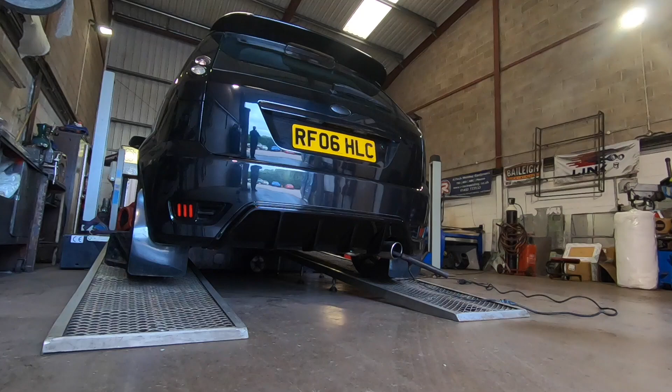I haven't done a video in quite a while. That's because, if you watched some of my more recent videos, I'm trying to save up for a couple of big things for the car, to make sure it's ready for next year's car shows, the main one being Ford Fair. Now, some may think this is pointless, but I just thought I'd share the results of today, out of interest, because it's to do with the car and what power it's actually running.

Going back months ago, when I had the full Milltek exhaust fitted to the car, with the sports cat, the 4:1 manifold, and the non-res catback, I ran the car for a couple of weeks, disconnected the battery for a while, and then went back to the same rolling road I'd used before the exhaust was fitted, just to see if it made a difference. It pretty much hadn't - it looked identical, maybe a few more horsepower, but that was it.

What's strange is Milltek themselves state that even a flexi pipe can gain you like 5% more horsepower. So I went to them and said I've got a full exhaust, I wasn't expecting anything crazy, but thought I'd get maybe 5 to 10 horsepower, and I was surprised I only got a few. Both them and the rolling road place, plus a few of you in the comments, said there are various factors involved. You can't expect a lot from an exhaust, but you'd expect something.

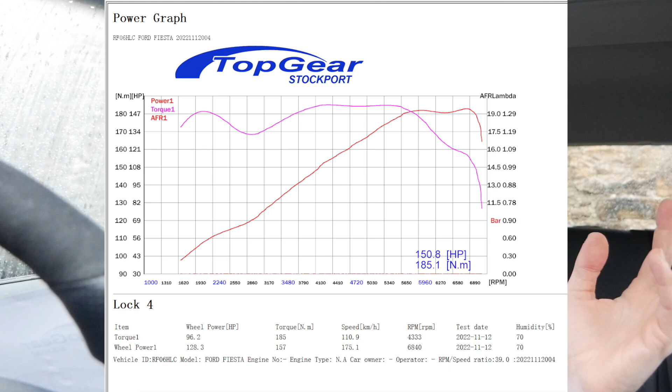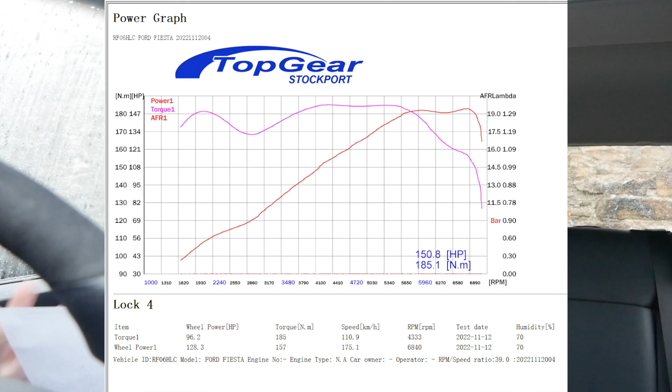That's something the place told me, but also I've had comments and private messages, back when I was testing the car with the numbers, that on rolling roads they don't quite get the power down quite as well as they do on the road. So they always say, for this car it's maybe 3 to 5 horsepower more.

So realistically the car is close to about 155 horsepower to be more accurate. Now, what does that mean in regards to where the car was at the very beginning, and also once the car had the exhaust fitted in the summer heat? So the first run, when the car just had the cone filter on and it was winter - actually even colder weather than when the car's just been tested - it ran 143 horsepower and 181.6 newton meters of torque.

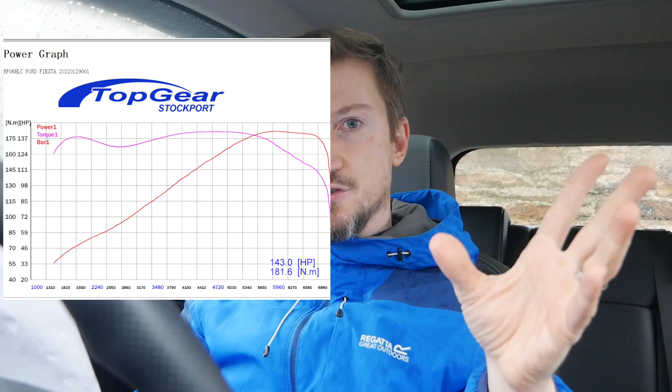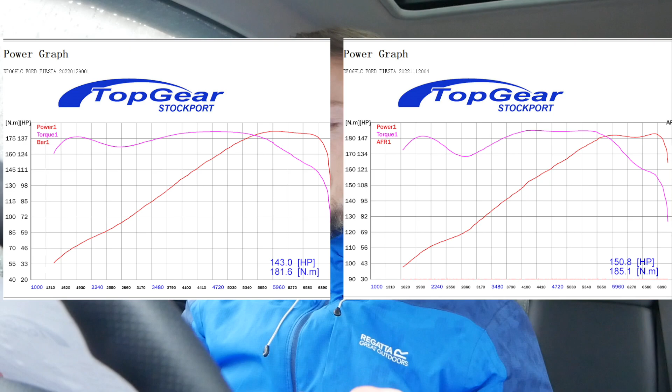I'm going to pop the graphs up on screen as I'm talking. Now, where it was after the exhaust, in a similar sort of temperature testing, it was an 8 horsepower increase and a 4 newton meter torque increase there.

Do you know what, that's not actually that bad. If the car had had a service just before I'd done the test, it probably would have hit about 10 horsepower more. I'm really pleased with those figures, because at the end of the day, that is just a full exhaust - it's had no remap, which obviously the car would really benefit from.

Actually looking at the graph - the recent one, done now in cooler temperatures with the full exhaust - you can see the red line, the horsepower is increasing and increasing, but then as soon as it hits about 6,000 RPM it does a bit of a dip, and then it kind of jolts back up again. So you wonder if little dips like that would benefit from a remap.

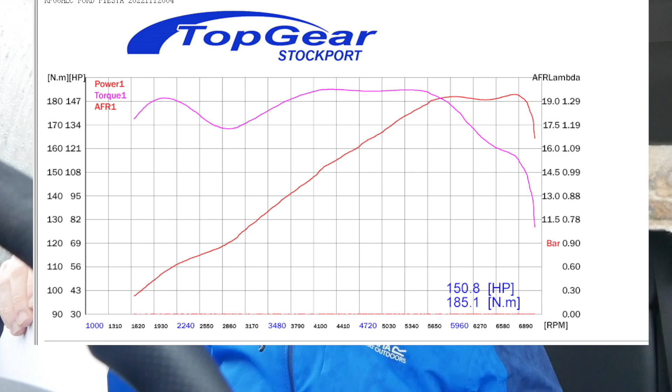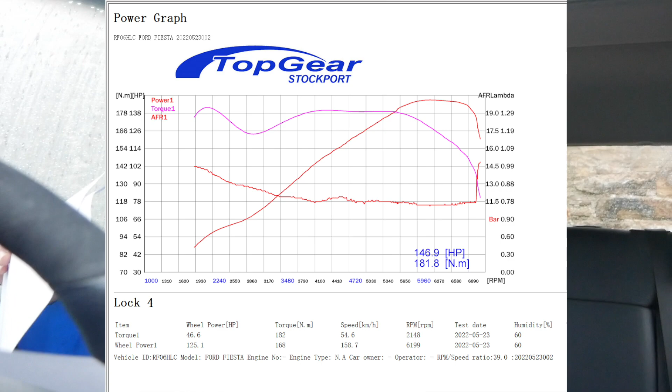Now, back when I tested the car in hot weather, it only produced 147 horsepower. So that shows I've gained 4 horsepower just because of the temperature. That would probably go up a little bit more when the weather is even colder.

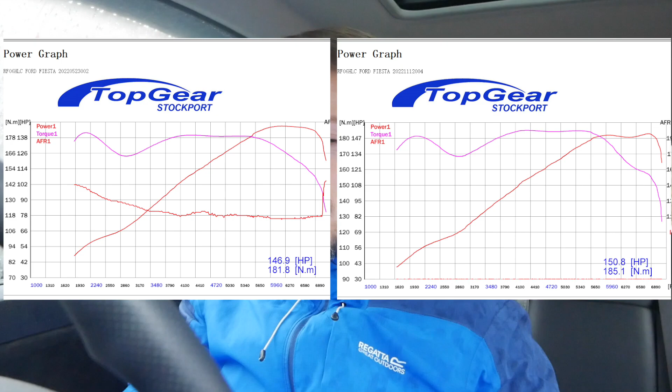When I did the test with the full exhaust in hot weather it only produced 147 horsepower - that was when we were getting those 30°C days, so obviously a big change. Then when I got this tested again now, when it's cooler but not that cold, it was about 13 Celsius. If it was even colder, potentially it might have gained another 1 or 2 horsepower, who knows?

So yeah, I'm pretty chuffed with that, to think that the car is probably producing, on a really nice cold day, about 150 horsepower and 185 newton meters of torque. And that's a really good benchmark of where the car is with just an exhaust and a cone filter. So I'm going to keep this all on record.

Because the plan with the car in the future is to do some more power mods, but I'm not looking to go for anything crazy - I'm not looking to stretch that 200 horsepower mark. My aim is to get it around the 180s, but with really good torque using that Fusion Fabrications inlet. When I started all these rolling road videos, I was saying how I'm not bothered about numbers, and I'm not, because I'm not bothered about saying I've got a 200 horsepower car.

I want a more usable car, but it is actually quite exciting and also quite addictive. I've been to this rolling road 3 times this year now. My wife really does think I've wasted my money, but please comment below and say I haven't, because I don't think I have. This is for my own benefit, but also for you viewers and maybe people doing the research into the cars.

It's good to see these benchmarks. The problem is, a lot of people might boast about the car having whatever horsepower with what mods, but then they've got nothing to compare it to. I've now got various graphs at various stages, in various temperatures and conditions, so I've got a really good idea of where the car was, where it currently is, and when I do get all the other mods done, honestly I think the car would transform, because I can feel a little bit of a difference just with that 8 horsepower. Honestly, I do think I can.